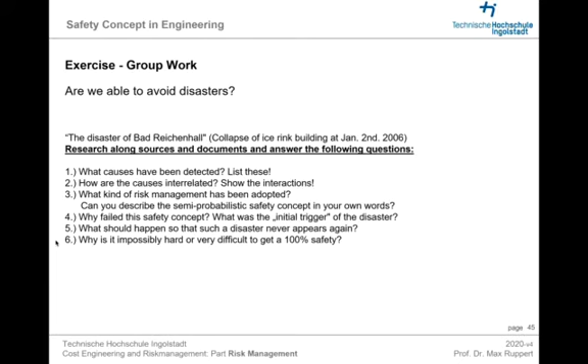You find the materials on our Moodle platform, chapter Technical Risk Management, and scroll down to lecture material part 2. And also read the paper about risk in engineering. You also find this on our Moodle platform in the chapter Lecture Scriptum all in one, Risk Engineering. Here it is.

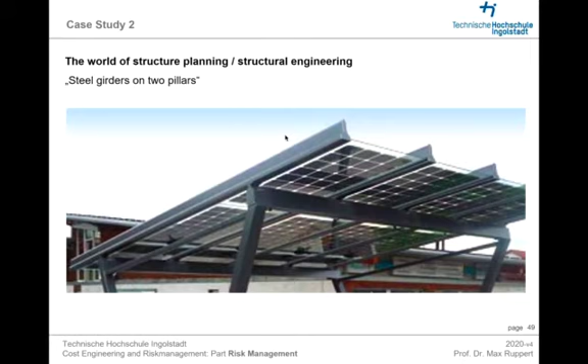Okay. Now, let's do our second case study, a steel girder on 2 pillars. It's about structural engineering. For example, you have this kind of roof. And the question is, which loads influence our roof?

We know there are loads like own weight or extensions that impact our buildings. Snow, wind, and some kind of extra loads, maintenance work, explosions, submergence of ground, and so on. All these kinds of influences act on our building, here on our roof.

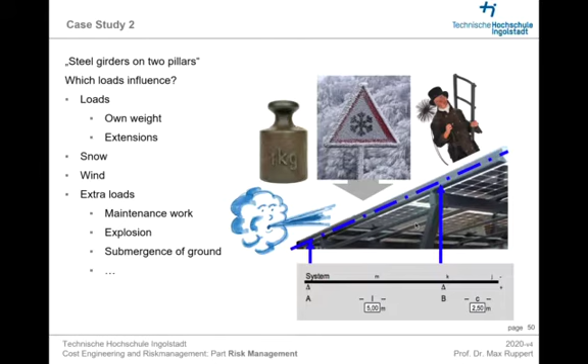From statics or engineering systems, you perhaps know that you can build the reality into a model. And that's what we will do with the loads. You've seen here the own weight, snow, wind, and representing the maintenance loads.

Okay, now the first question is, how often do they influence? Always, often, sometimes or rarely, or never. For example, the own weight of the structure is always there. What about snow, wind, and the maintenance load? Answer this and put it in the space here.

The second question is, how exactly can you estimate them? Can you estimate it exactly, roughly, or not at all? Of course, if you're not able to estimate a load, then you're doing it wrong. Ask an engineer. No. So this is not useful. Not at all does not exist. So decide between exact and roughly.

For example, the weight again. The weight should be estimated and calculated exactly. The third question is, do the loads occur simultaneously? What about the combination of the loads? Is it probable or not probable?

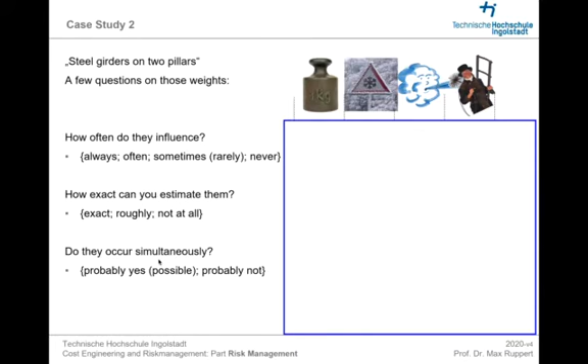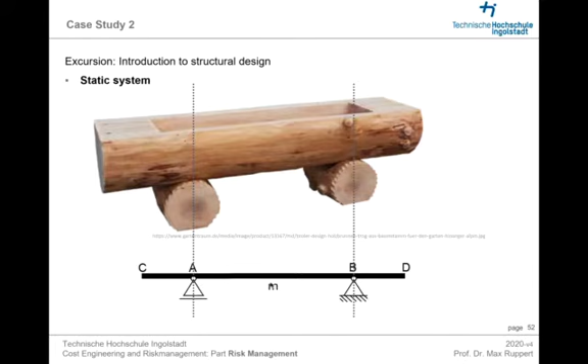And now, we can imagine different load situations. The weight of the wooden construction, filled by water in the middle, and sometimes people are sitting, for example here, on the corner. It's a single load on the corner of the structure. On the second line, you see the statical system.

Here the weight is always and everywhere on the beam, from C to A, from A to B, and from B to D. The water maybe is there if it's filled, or it's not there if it's not filled. So the answer is, it's not always there. And it occurs only in the middle when it occurs. So the water load is between A and B.

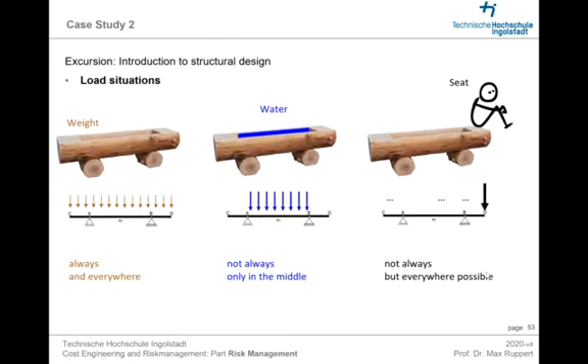And last but not least, one sits on the corner of the construction, possibly on point D or at any other place. So it's not always there, but it's possible everywhere. So there are certain points of interest. For example, on the bearing at point A or on point B.

And this situation is typical, you don't have to do both A and B. It's A or B. Because if you calculate the system at point A, because of the symmetry, you have calculated it at point B. So, this is the first point of interest. Another is in the middle of the beam, M.

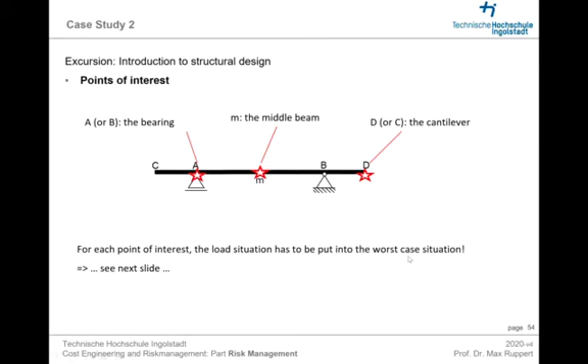Or the third point of interest is on the edge of the cantilever, D or C. For each point of interest, the load situation has to be put into the worst case situation. The worst case, see the next slide.

Worst case situations. If your point of interest is A, here, then you have to put all the loads on these places where you have the worst case situation. So we start with the weight. You have no choice for the weight. It's everywhere. So it doesn't matter if your point of interest is A or anywhere else. The weight is always and everywhere.

And remark, the weight between B and D is unloading the situation. But nevertheless, the weight has to be put everywhere. What about the water? Yes, it causes the worst case situation for point A. So put it in the middle. And the seat, the person is sitting on the edge or in the middle of the beam or anywhere else. You sit the person exactly to the worst case situation, so exactly on the point of interest, and this is in our case A.

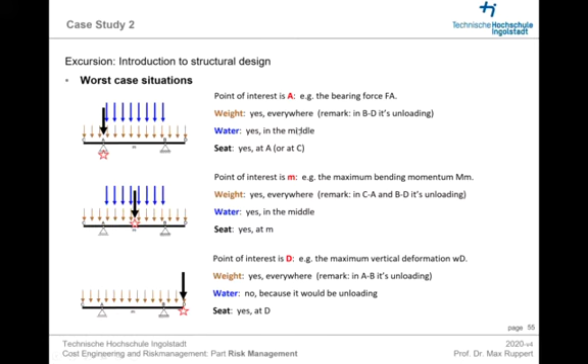The next step is engineering design. You have to calculate the force in the point A, for example, the bearing force Fa. And this calculated force has to be lower than the allowed maximum force. With this, you can prove safety. In the second case, you have the bending moment in the middle of the beam. You have to calculate it in the situation that causes the worst case seen before. And again, your calculated value here, the moment, has to be lower than the allowed maximum moment to fulfill the safety condition again.

In the third case, the maximum vertical deformation at the edge here should be fulfilled. You calculate the maximum deformation due to this loading situation, and again, it has to be lower than the allowed maximum. I summarize. It's all about the equilibrium, that the impact has to be lower than the resistance.

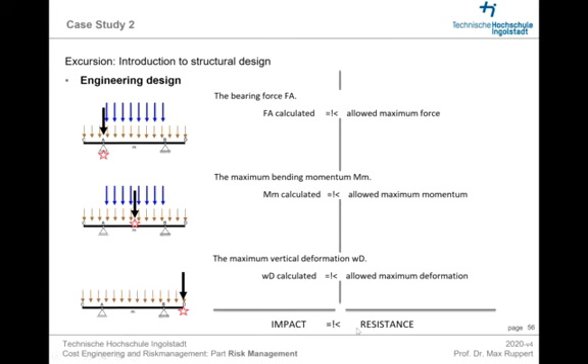But how to calculate the values of impact and resistance? All quantities are usually distributed according to probability, the well-known Gauss curve. Also here our impact and also the resistance. We learned from the slides before that the impact should be below the resistance, or in other words, the resistance should be higher than the impact. But of course there are situations where it fails, where the resistance is below the impact. And your job as a structural designer is to get the impact below the resistance with design values.

In the first step, you have to determine from the Gauss curve, for example, the mean value of the impact. Then you add some safety factors to go from the left to the right. And then you have a defined design impact value. You do the same with resistance. You determine the mean, the middle value of the resistance. Then you calculate some safety into it, make it safer to go from right to left. And last but not least, you have a design value for resistance.

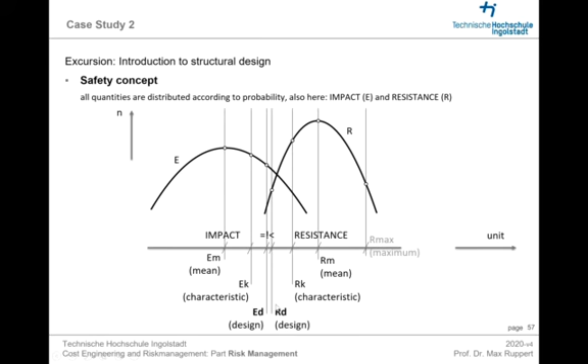And your proof at the end is that your design values have to be compared. And again, the impact has to be lower than the resistance. If so, you proved safety. Impact below resistance, according to the design levels. The design level includes safety on both sides, on the side of the impact and on the side of the resistance. What are the safety factors?

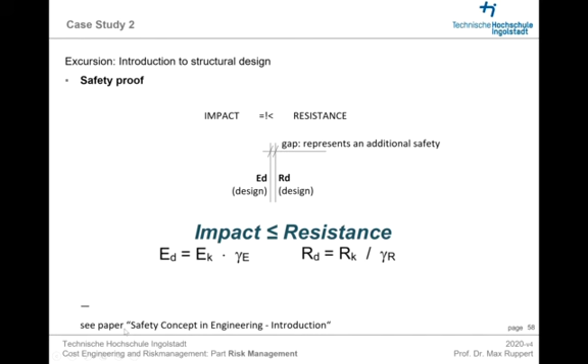The design value includes a safety factor, gamma impact, multiplied with the characteristic value of the impact. On the other hand, the resistance design value includes safety by dividing the characteristic resistance value by gamma R, the safety factor. For further details, see my paper Safety Concept in Engineering, an Introduction.